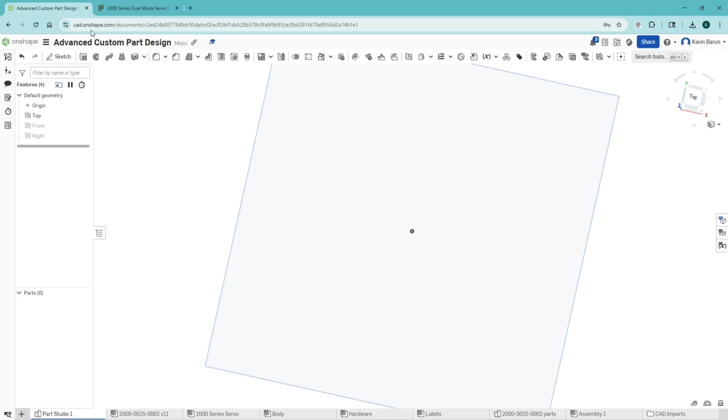Before modeling, we need to know the servo's size. The goBILDA 2000 series servos are roughly 40 millimeters long, 20 millimeters wide, and 27 millimeters tall. So in my sketch, I'll construct a rectangle that's 41 millimeters long and 21 millimeters wide for an easier fit. Then I'll extrude both the inner and outer rectangles 3 millimeters for the base.

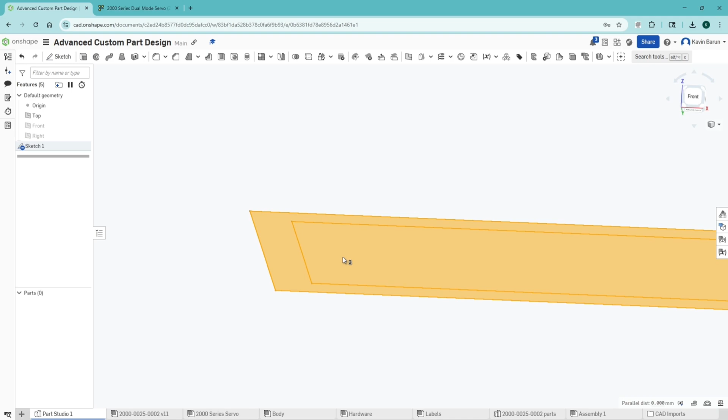Then I'm going to extrude this plane 3 millimeters to create the base of the case.

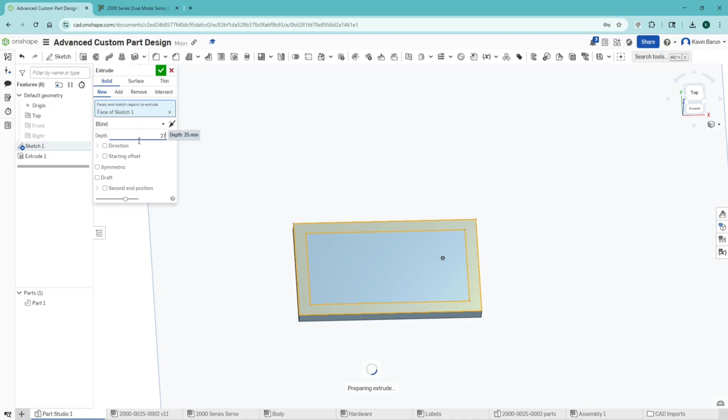Then I'll extrude only the outer rectangle 27 millimeters high to create the entire shell. This is the outer case of the servo.

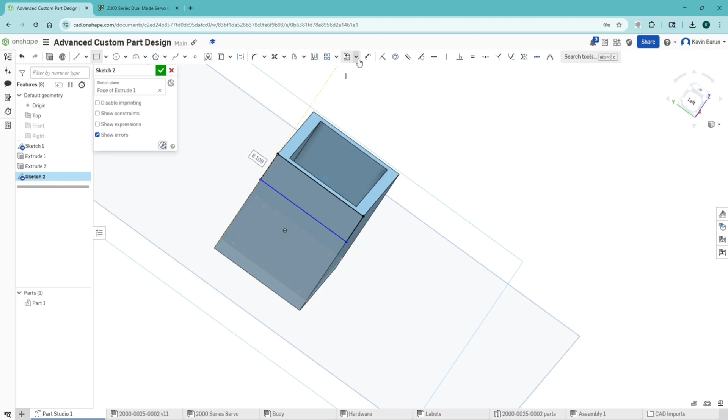Then I need a place to put the screw holes. So on the side, I'll create a sketch with a rectangle that's 3 millimeters, and extrude it to 6 millimeters for space for the holes. Then I'll repeat the same thing on the other side.

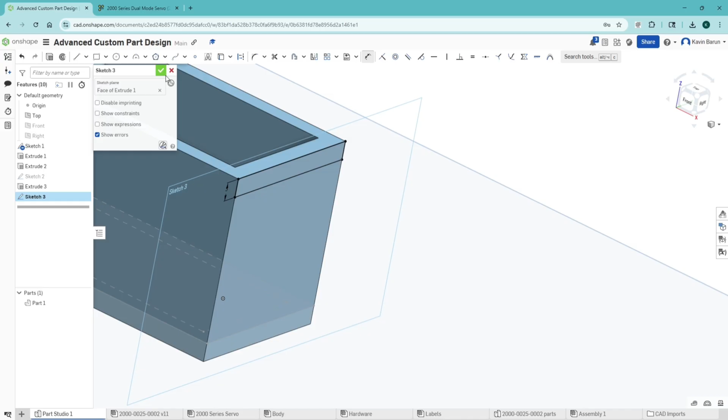Then I'll chamfer the corners under the extensions for better structural integrity.

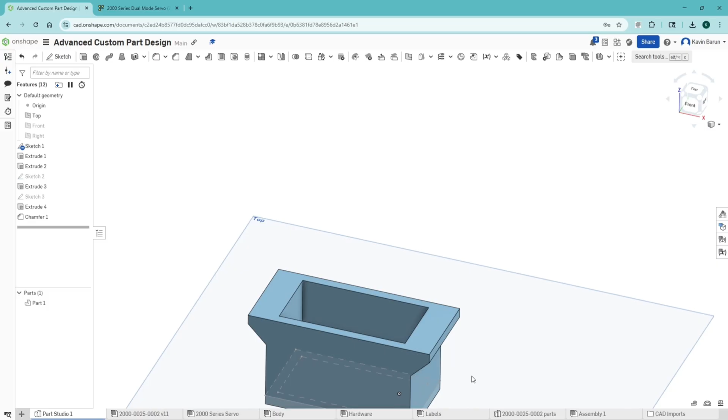Now I'm going to create and align the holes in the right area. So first I'll sketch the plane on top, and then I'll create 4 holes. I want the holes to be 4 millimeters wide because it's for M4 screws.

Then I'll make each of them 4 millimeters by using the equal constraint, and then using the vertical and horizontal constraints, I'll align all 4 holes with each other.

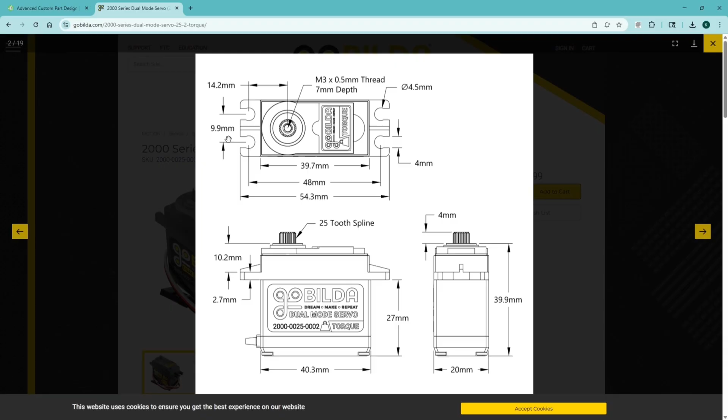Now for the spacing of the holes, we can see in goBILDA that the holes are 48 millimeters apart and 9.9 millimeters apart vertically. So I'll do that.

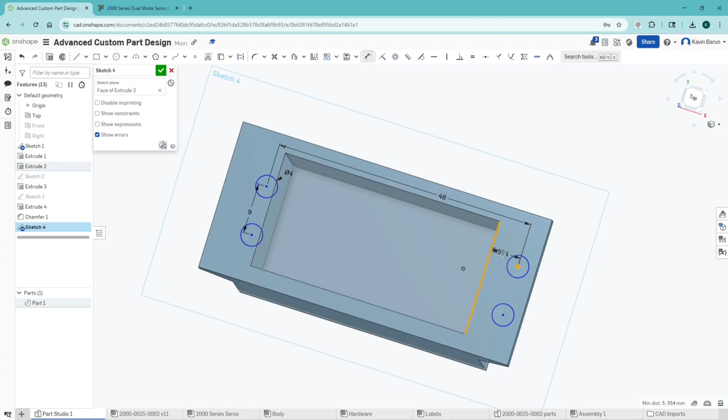Because the hole is 41 millimeters wide and the holes are 48 millimeters apart, the distance between the center of the circle and the hole has to be 3.5 millimeters, and the distance between the center of the hole and the edge has to be 8.05 millimeters. So that's for the alignment of the holes.

Now I'll extrude each of the holes by 9 millimeters.

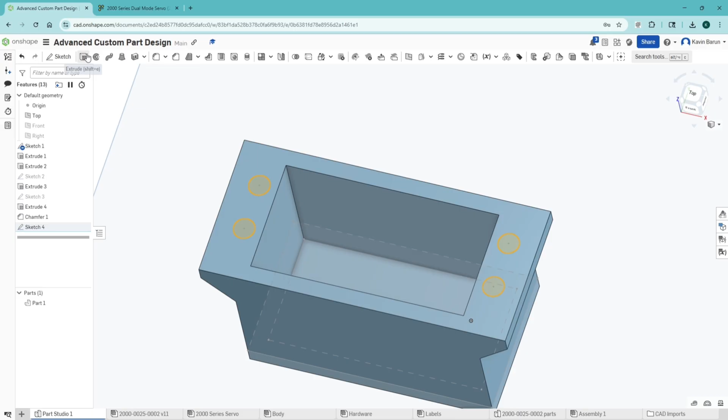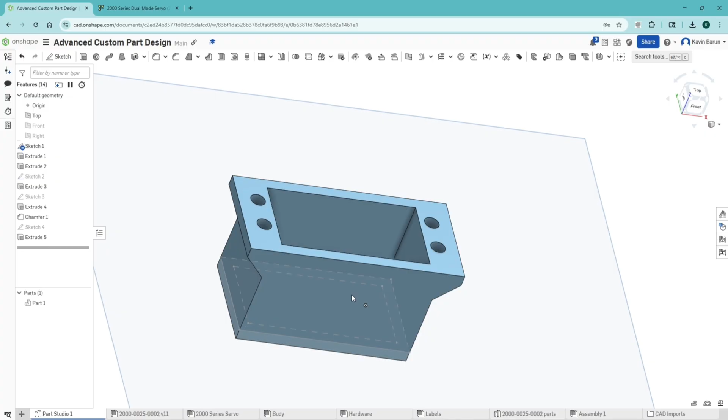So holes can be added anywhere in the servo mount to increase versatility, but advanced custom parts are extremely effective and flexible in design. Now that I'm done with the design, I'll insert the servo case into the CAD assembly of the servo, and I'll test fit it.

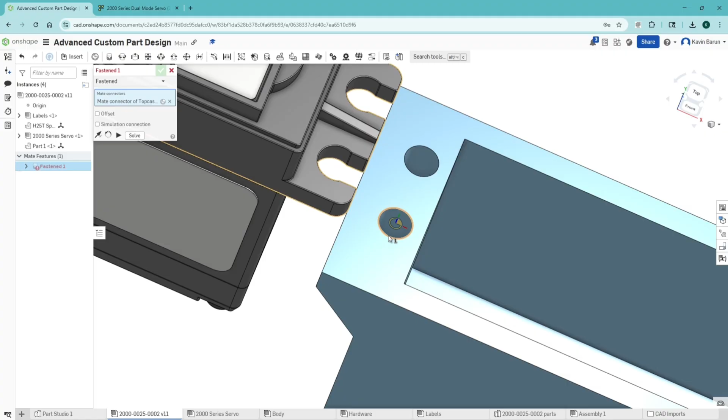I'll use the fasten tool to snap the servo into place with the case. As you can see, it fits perfectly. So that means the design is perfect.

The usefulness of custom parts was already mentioned in a previous video, but what defines an advanced custom part is that it focuses entirely on one issue and completely solves it. That's the reason advanced custom parts are extremely useful.